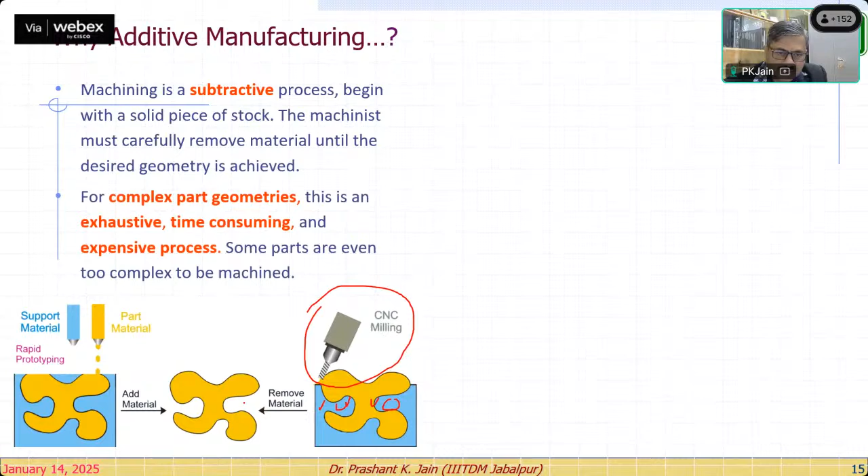So removing material from these areas is very difficult. So instead of going for a subtractive process, we choose to go for an additive manufacturing process, where we deposit the material successively. So here you see this is the part material, and this blue color is the support material, right? So instead of subtractive, we are adding the material to a component. So this is what we call additive manufacturing.

And the main advantage we get when we go for additive manufacturing, or you say 3D printing, is that the complexity of the part is no more a limitation. Any complex part, whatever we can imagine, whatever geometric modeling can be done using any of the software, we can print. So we often say a picture is worth 1,000 words, right? Instead of communicating in word language, you would prefer to give a picture.

Initially, additive manufacturing or 3D printing was developed as a communication tool, where people wanted to communicate with their team members, share their ideas, share their product with the patent office or something like that. So suppose we have a picture, which is known to be worth 1,000 words. Now what is happening? We have a model in our hand. So a model is worth 1,000 pictures, right?

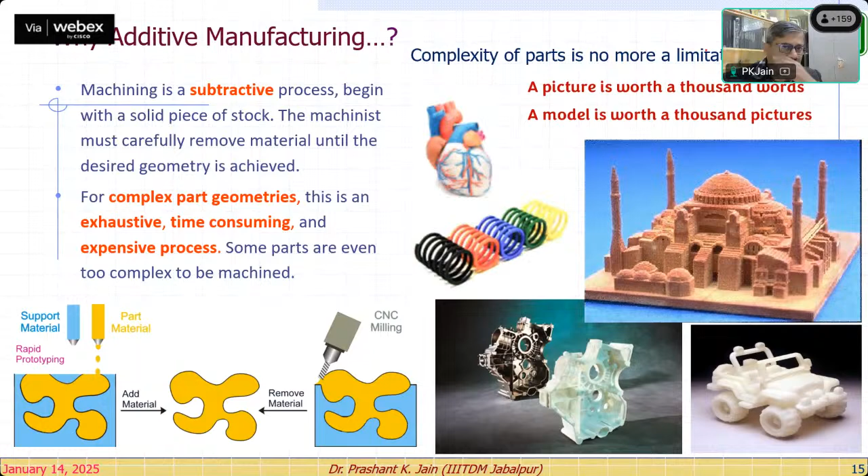So this is the advantage we get with additive manufacturing processes. We can save a lot of time, we can save a lot of material. The process is very, very fast, right? So with this advantage, we go with additive manufacturing processes. I will be coming to the biomedical applications. Then we have the two processes.

So the first process, which is most popular, easily available, and nowadays very economically viable for you, is known as fused deposition modeling. Just like our Mehendi cone, we use two filaments. One filament for support material, one filament for part printing material, and we have this layered information, right? So everything in additive manufacturing you want to have in layered information. So one layer, second layer, third, fourth, up to the top.

And here we detect the overhanging surfaces. So below this overhanging surface, the support is generated. And in the FDM process, this is done on the platform. This is a closed chamber, and two wire spools are there, the heated rollers are there, and here are the extruder head and heated nozzles. So from this, both materials are extruded one by one on different layers. For example, on this layer, here the support material is deposited, here the part material is deposited.

And from here you can see how every layer is modeled. So see the different models and different parts you can get. This is the house model, this is the big assembly for an engine model, right? Then you can see this process video as well before we move further. So two processes we are going to talk about.

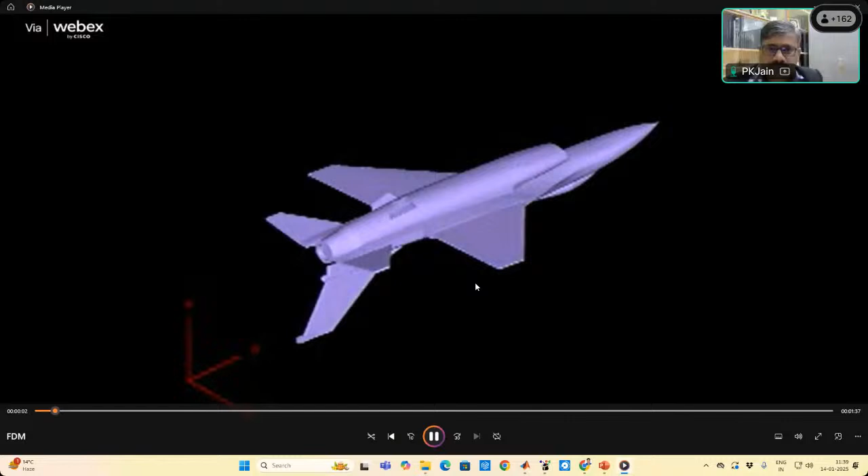Starts as an STL file generated from a 3D... Can you listen to the sound as well? Yes, sir. CAD program. The model is oriented within the computer exactly as it will be built in the FDM machine. Orientation may affect build time, strength of features, and support material generation.

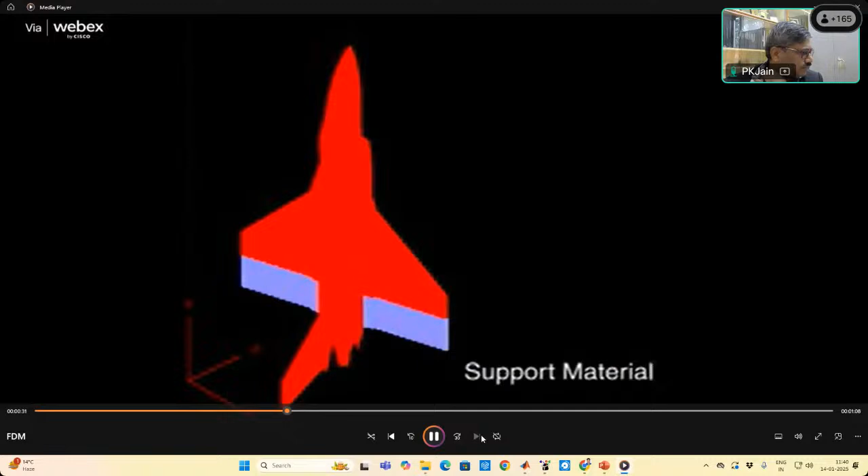Once the model is oriented, the software divides the model into evenly spaced planar sections, each measuring as small as a few thousandths of an inch. Supports are then generated for overhanging sections. Each layer consists exclusively of non-overlapping and non-intersecting curves. Tool paths are created in the regions, indicating whether the FDM machine should extrude model material or support material. Once the tool paths controlling the XY movements have been generated for all layers, a file is created and sent to the FDM machine.

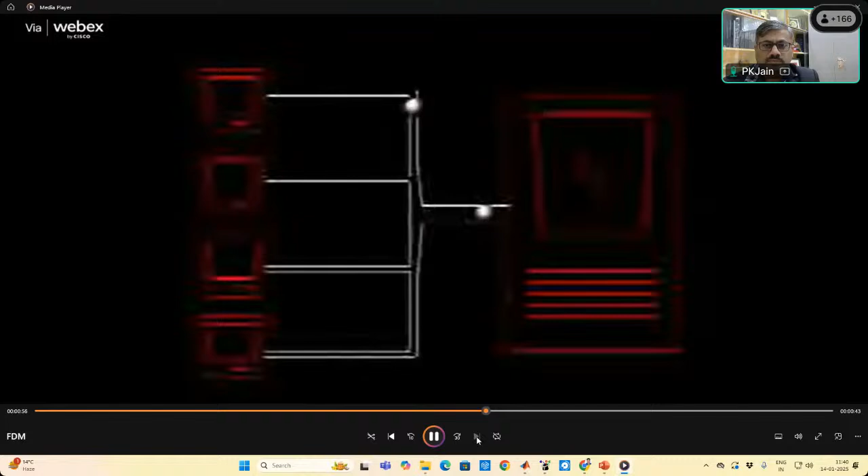Inside the heated build envelope, the model material in filament form is heated to a less viscous state for extrusion. The model is built layer by layer from the bottom up. On each layer, the extrusion tips follow the tool paths calculated in the computer. After each layer is completed, the plate drops and a new layer is added. When the final layer is complete, the model part can be removed. After support material is removed, you are left with a strong, durable, and functional prototype.

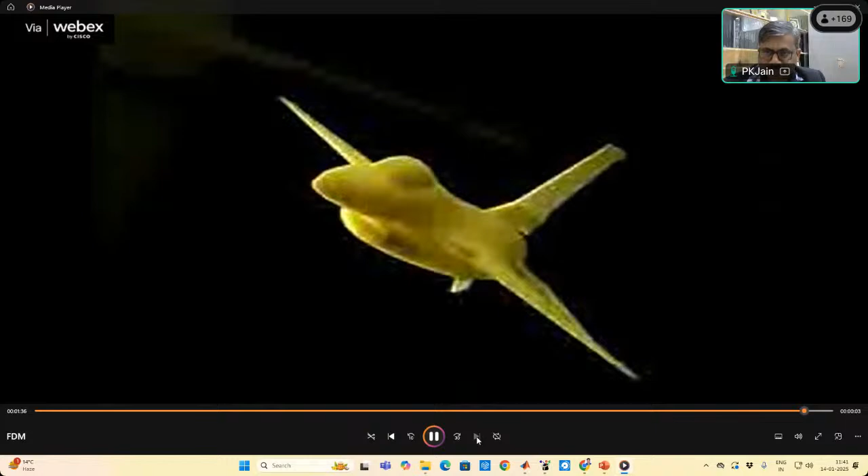Right, so this is what we have, the FDM processes, right? Very briefly I am going. If you have any question about the process, please type in the chat box. I can read on another device and I will discuss. Otherwise, I will keep on moving, right?

So the next process, very briefly, I'm going with the SLS process so that we will be able to understand why we are talking about the programming to be done in MATLAB or any other software package, whichever you would like for comfort. If you are good in programming, you can use Python or anything else, right? I have done a lot of programming to have my own apps, my own machines to be controlled. I'm using MATLAB.

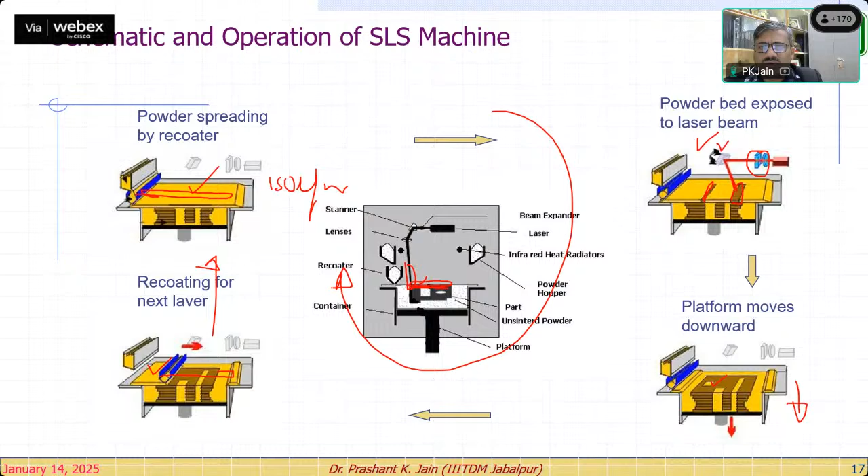Once it is solidified, this entire platform will go down. Once this platform goes down, right, you can see this selected area. Now this recoater will again recoat the new layer, right? So your system will be ready for the next layer. Then this cycle will keep on continuing until the full part is fabricated, right? So look at this one small video. Okay, let it be in this screen itself.

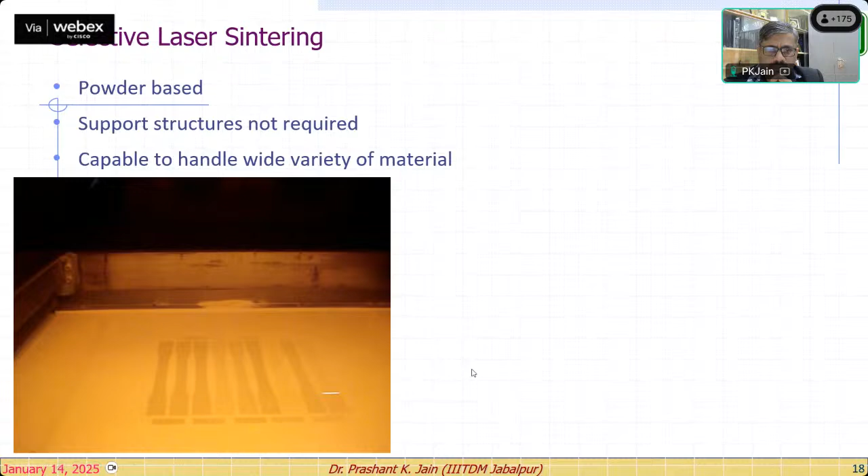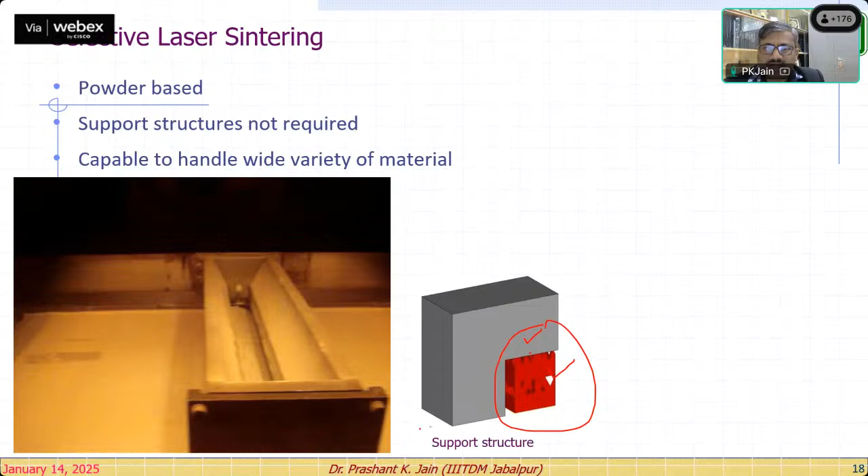See, this is the recoater. See, this is the recoater spreading the new layer on the pre-built part. So the platform goes down every time. And you see, in the FDM process you require support for overhanging features, but in the SLS process you don't require support, because the unsintered powder in the powder bed will support overhanging features like this here, right? So this is the unsintered powder and this is the solidified powder, supported by the unsintered powder material. So you don't require any additional support structure in the case of the SLS process.

Now see which kind of parts you can build over here. Hollow space with two different materials. Okay, to create hollow space with two different materials. Are you talking about two different materials or two different layers?

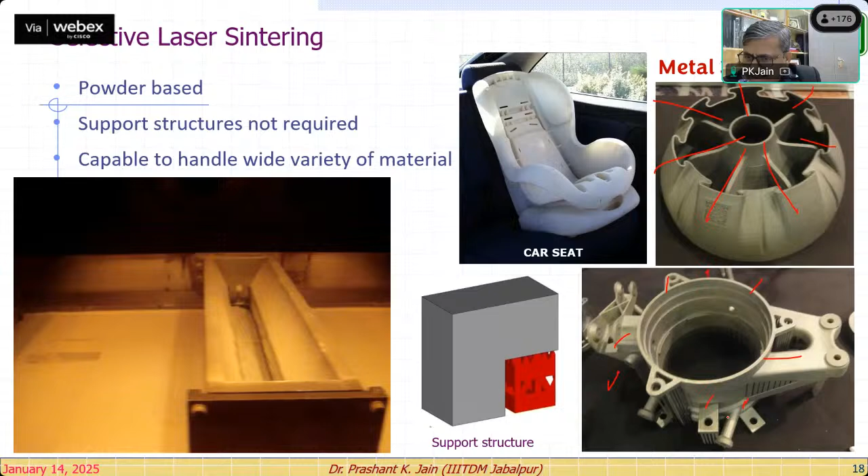No single parting line or parting surface would be sufficient. More than 20 parting surfaces would be there, and you have to assemble the die, do the casting, and then remove the die. See, similarly in this, how many parts this component has. So the machining is almost impossible, and going for forgings and castings it is very difficult to create a die, right? Every time the investment casting.

But when you go for additive manufacturing processes, that you can easily create. You can see over here, using additive manufacturing, such metal components can be done.

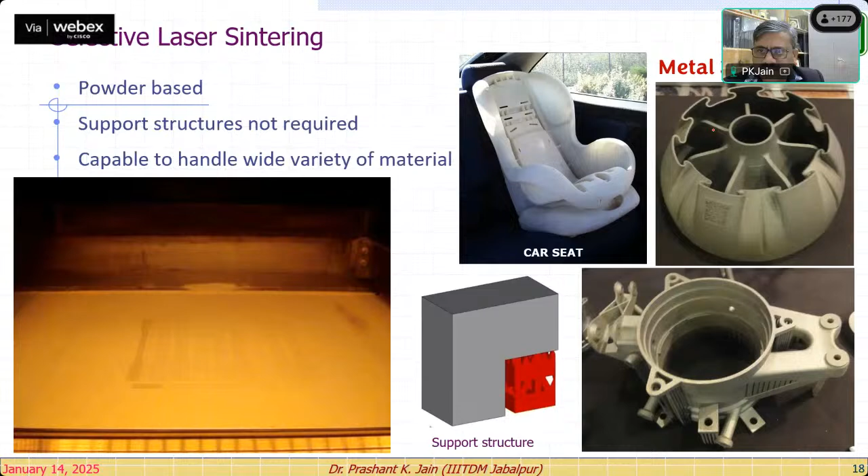Now look at this. I'm coming back. First I have covered the processes. Now I'm coming back to the process chain. You see here what we have to do. The creation of geometric model. You can do it with ProE, CATIA or any other software, whatever you would like. Then you have the tessellation, right?

What is tessellation? Anybody have any idea? You can type in the chat box.

So see here, this is the tessellation. You have a spherical ball, and this spherical ball is converted into the piecewise approximation of the surfaces, right? So everywhere the surface is a planar surface like this, right? And once we take the minimum sided surface, we reach the triangle, right? So once it is in triangles, we call it the STL file, standard triangulation language, right?

And then we do the slicing. So what happens, this tessellation only facilitates the slicing processes, because otherwise it will be very, very difficult to have this surface cross section calculated, right? So see, look at this, one cylinder, you have another cylinder. Can you identify the difference?

This cylinder is a cylindrical surface, and here it is a tessellation. So you see everything is now converted into planar sections, and it has to be mentioned in triangles, right? Standard triangulation language. So that's why everything is now kept in triangles, right?

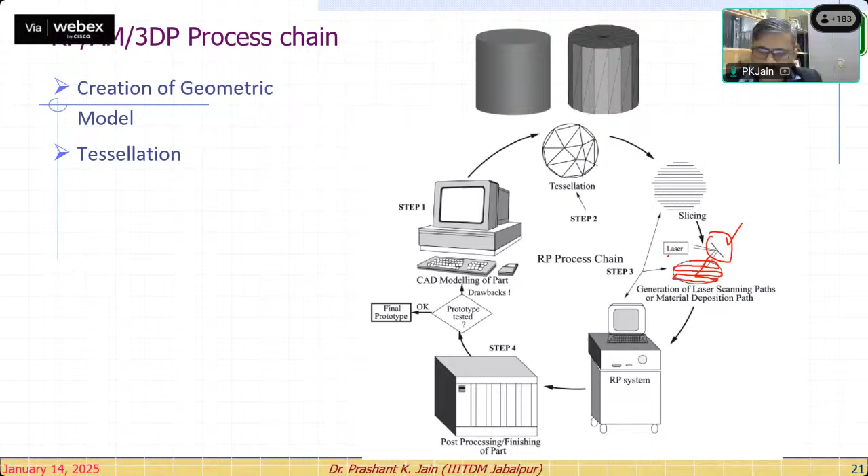Once you do the slicing, after that, either the nozzle path, depending on the technique. If it is an FDM process, then you require a nozzle path, and if it is an SLS process, then you generate the rotation of the galvano scanner to find out the laser scanning path. Once you have the laser scanning path, you can print the part, you can make the fabrication of the part on the RP system, right?

Then you go for post processing, cleaning, finishing, etc. Then after finishing, you can check whether the prototype is correct or not. If not, then you have to make some modification in the model, right? So you have to do the post processing to have the final better finished product in your hand. This is the process chain we follow. Starting with the geometric model, tessellation, slicing, nozzle path generation, then part fabrication, and the post processing to be done over here.

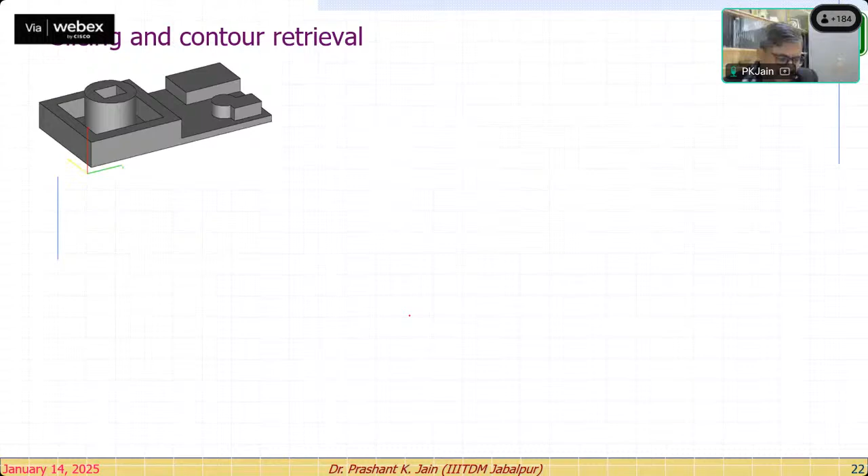Right now, let me show you how we are going to implement this entire process. Many of you are aware of many open source softwares or some high cost software like Magics, Mimics to repair the STL files, and after repairing the STL file, then do the slicing, generation of the nozzle path, etc. Okay. So look at this. This is the ProE model, right? We have created it in the software ProE. You can create it in CATIA, AutoCAD or anything.

Now you're coming to the second file. Can you notice what this file contains, the entire file? Yes, a meshing kind of thing you can say, but here there are only triangles.

Yes, the tessellation is similar, you can say the meshing, but here only the triangles are there. And the important thing you notice here: where there is a planar surface, only two triangles are sufficient. Here you see the circular surface you are getting. So the size of the triangle is very, very small, so that you should not lose the intent of the designer, or you can better approximate the curved surfaces, right? So here the triangle is small.

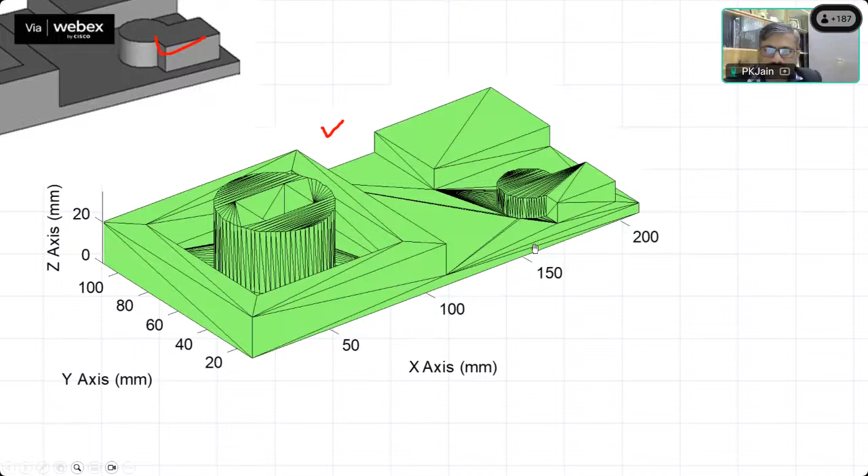You can have a larger number of smaller triangles, but if you have more small triangles, the number of triangles in the file will be increasing, and hence it will increase the complexity of the file, because next you have to calculate the intersection, right? So you see on this top surface only 2 triangles are sufficient. Here 2 triangles are sufficient. Here in between one edge is coming, so more than 2, 3, 4 triangles are there, right? So this is how you have the triangles. Now look at this slide.

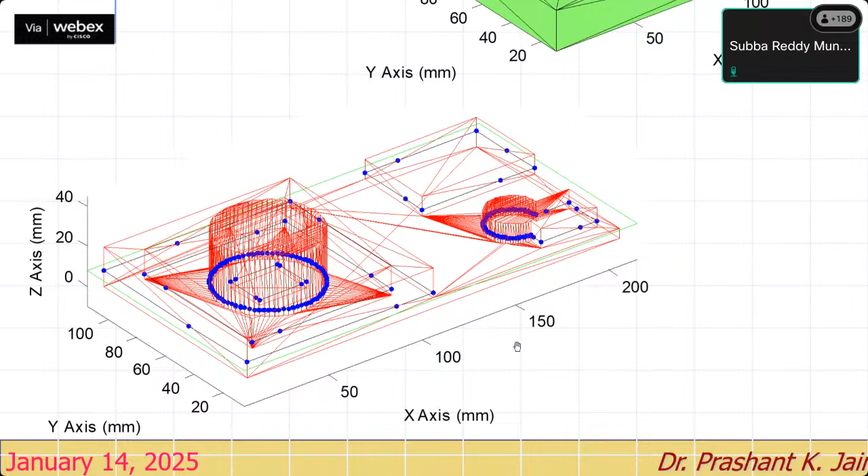Yeah, generally if we talk about tessellation, we can take any polygon. I will show you. Very good question. Please remind me towards the end of the session. We are developing a new STL file. Because the STL file is already a de facto standard, every vendor and manufacturer uses the triangle, right? So if it comes to the STL file, we have to use only triangles, but we are working on higher order polygons. I will show you in MATLAB. We are removing redundant data from the STL. In this session I have not included much on the STL file, but if time permits, I will go back to talk more on the STL file. Thank you for your interest.

Look at this. So for these triangles, the blue color dots, we are finding out the intersection points, right? Now if we plot all these blue color points, we are going to receive this. This information is not at all useful for us, because the random triangles are there in the file and we are just calculating the intersection points and plotting them, right? What we want here is an exact contour. Suppose we are intersecting at height 8, so we want this intersection. We will get this external contour, this internal contour, this contour like this. So this information we need to transfer into this form, right?

And what is happening here, you can see from this point we have identified this as a contour, right? This is another contour. Got it? So you see here, this is the external contour, blue color. This is the internal contour, dotted line, red color. There are clear-cut directives, methodologies, algorithms in the CAD applications on how to write the information of an external contour and how to write the information of an internal contour, right?

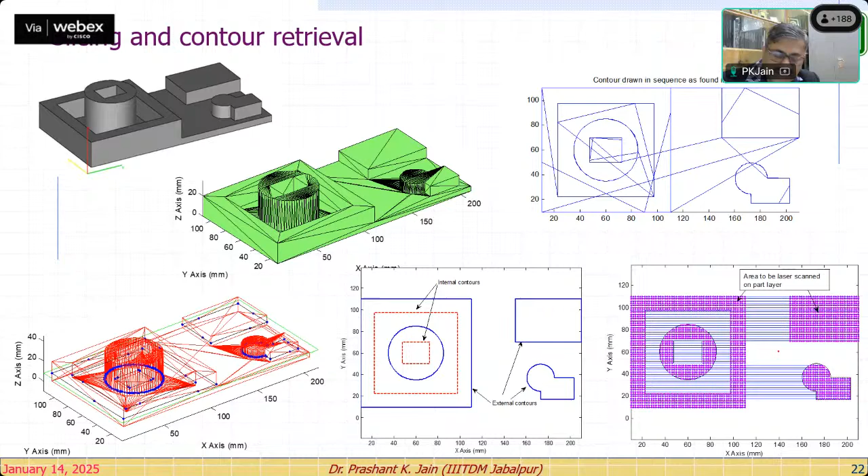Now look at how we do this. For example, I am taking you to the Magics software. Is anybody aware of the Magics software? Please type yes in the chat box, or else I will take you to the software screen. Okay, this is the Magics software screen. Let me move to the software directly so that I can show you. I hope you can see the software screen.

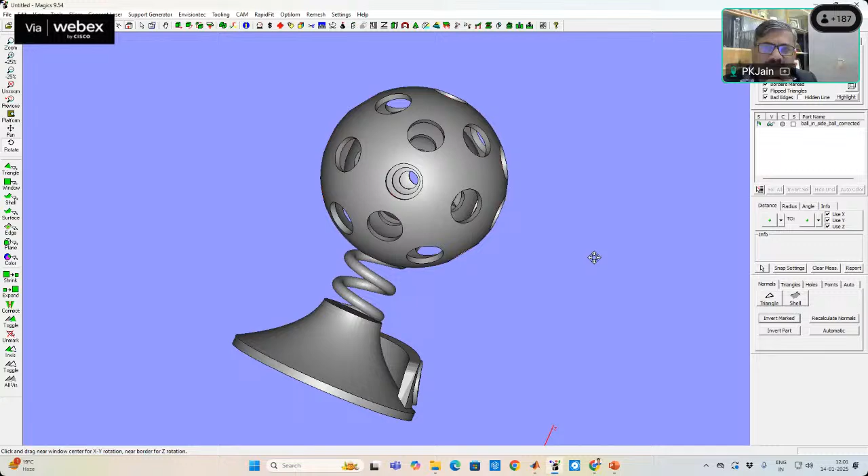See, this is the part. I think somebody was asking how we create the difference between two parts, two layers. So look at this. This part has three spheres. You can see inside there is a hole. There are three spheres, one inside each other, and they are not touching each other. We have seen the video for selective laser sintering processes. If we go like this,

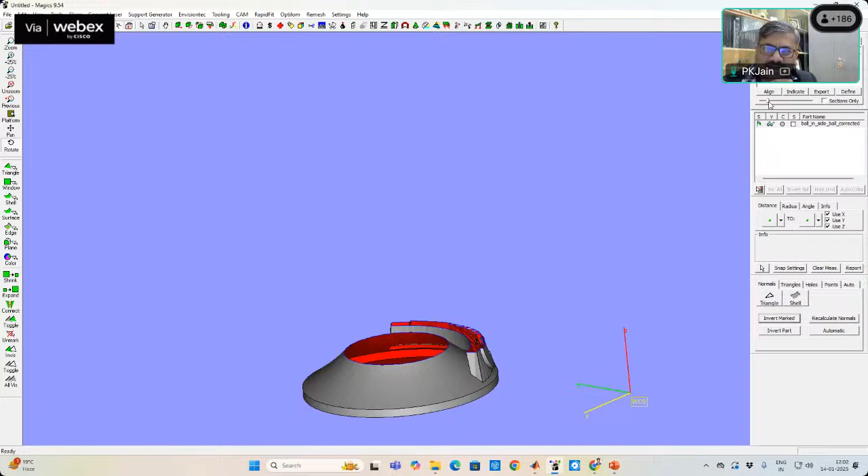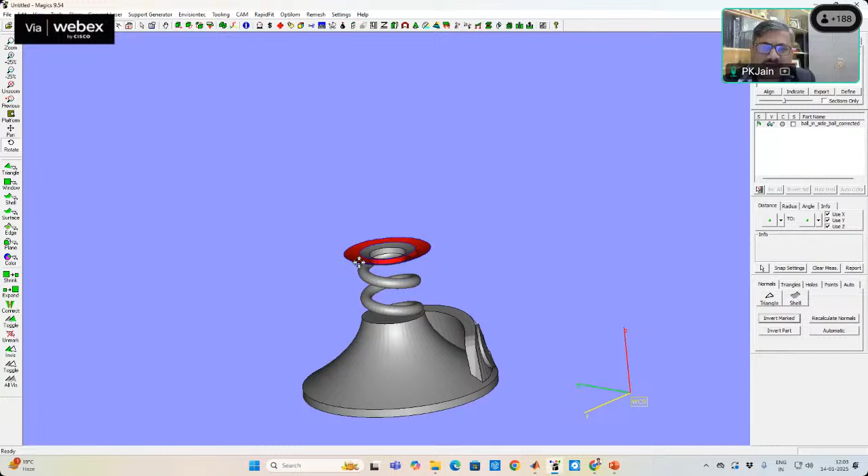The software is doing this for you, and in the previous slide I have shown you how we can do it by our own programming skills. You can use MATLAB like this. This software I am showing is paid software. You can do a similar thing with open source software also, but they do not have as many facilities. Okay, so look at this. At this height, the first sphere will start solidification.

Now let me move a little bit further. You see, four contours are there, the four red color contours you can see over here. So only in the red color area is the solidification; the laser will come onto this area. And the remaining area will be supported by the unsintered powder. Okay, now look at this.

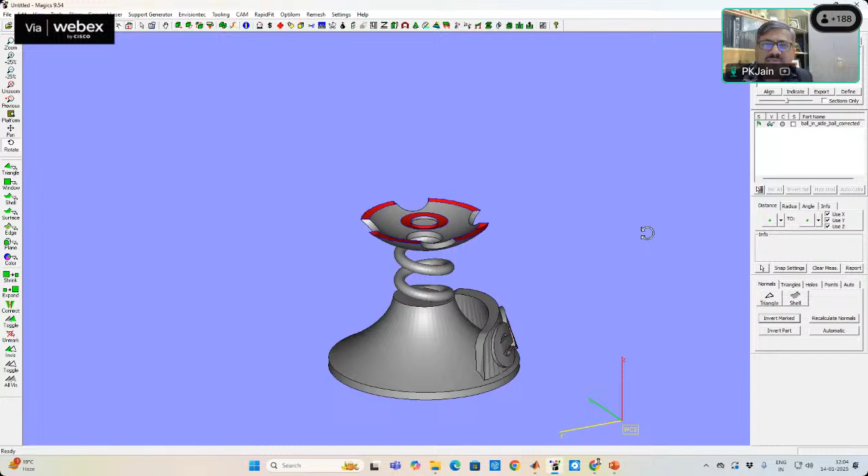If I move further, you see the second sphere starts building, and there is no connection between the surfaces. The second sphere appears just like that in space, not touching the previous sphere. But they will be built. The unsintered powder in between the spheres will provide the support. Look at this, I'm moving like this. Second sphere. Now you see the third sphere coming into the picture.

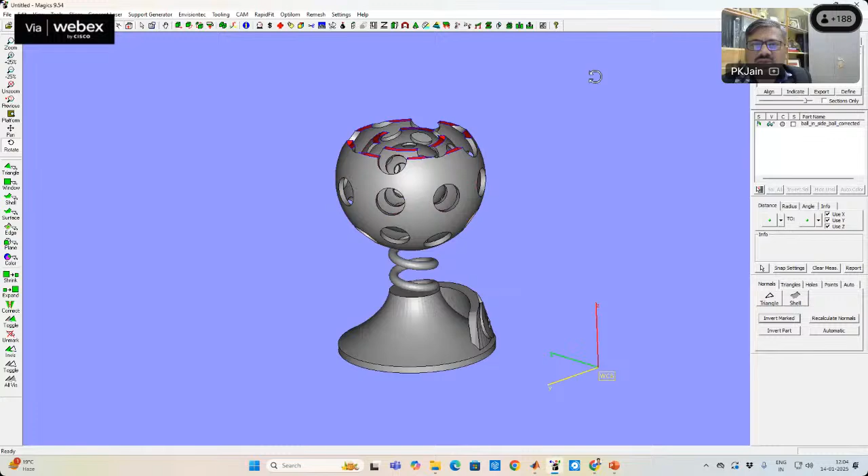So this way we continue in the actual building. This is the third sphere in the software. Look, the third sphere is about to complete. The sphere is complete, and the first and second are still going on, and in between these three spheres unsintered powder is there, trapped inside. In the design of the part itself, there are holes. They will provide support to each other, and the unsintered powder will be removed. So the part will be built as a single piece, without joints, without any assembly.

Let me move further. So this is the sectional view I have shown you. Now let me show you the triangles. Can you see there are a lot of triangles on this part? Now look at this. The entire surface is now triangulated.

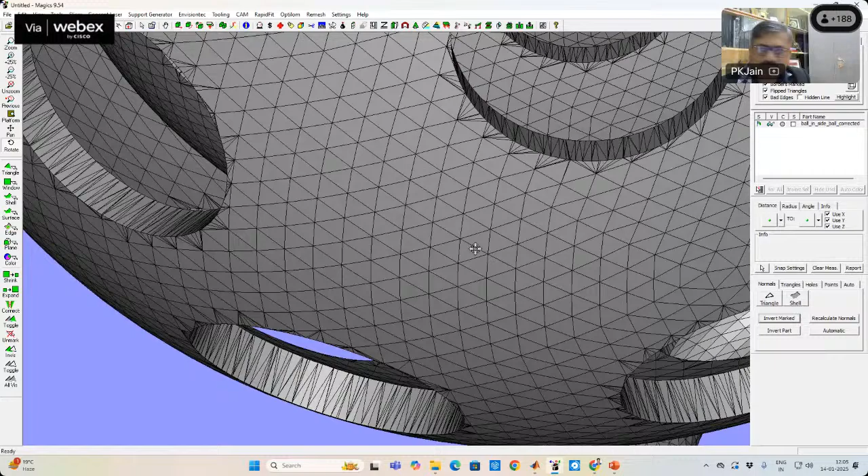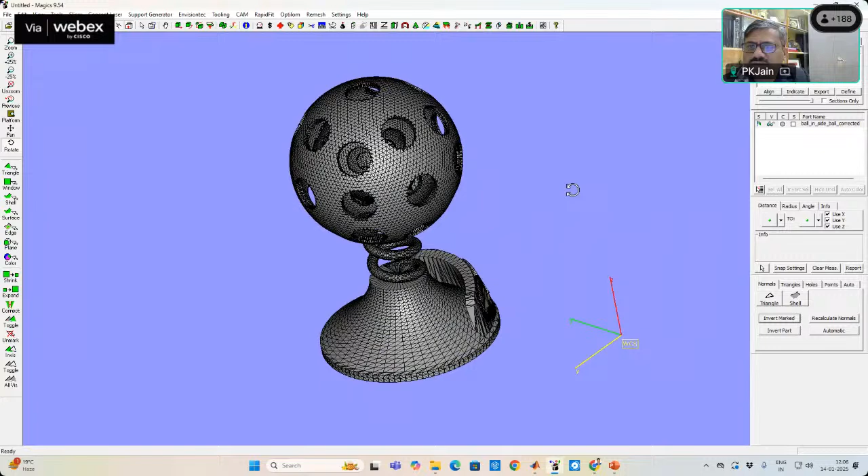This triangulation we can do with the STL file, and a lot of errors can be there. Now next I am talking on the different errors going on in this part. Let me take, and you see if I go for the sectional view as well in this mode. So look at this here, the sectional view is there.

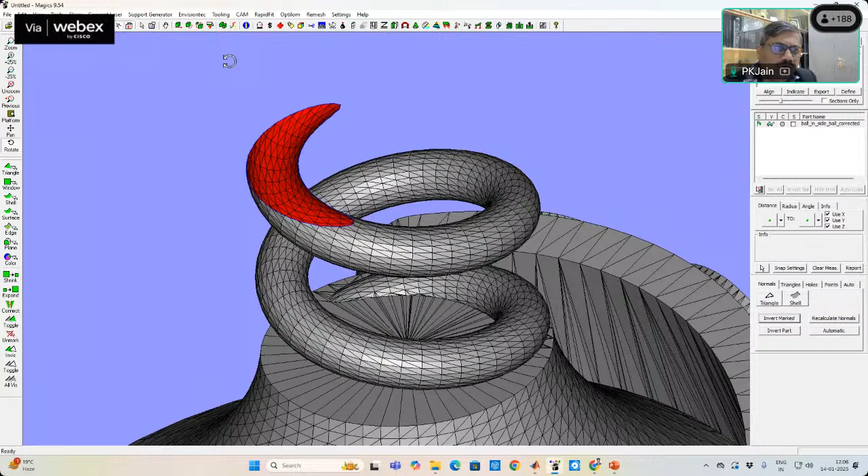So from these intersection points, these triangle points, you are connecting them, and you are creating the contour information, then generating the nozzle path. Okay, let me go back. At this moment, I am not taking any other feature of the software. Right, so this is the way we have done the slicing, or you can say the STL file repair, etc. we can do with this Magics software. Now you can do a lot of manipulation, you can cut the part, you can write text, engrave many things.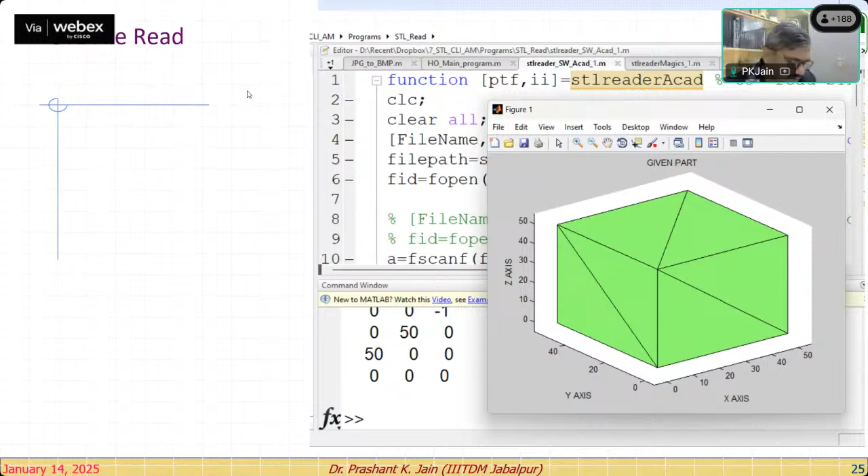Okay, now we will come to the MATLAB part. We can open this STL file in MATLAB, we can see the manipulation of the file, we can repair the file. Okay, so look at this. Has anybody opened an STL file in Notepad? Is anybody working with STL files? Type yes or no in the chat box.

You can see on your screen the STL file exported, one on the left side from SolidWorks. Right, this we have exported from SolidWorks or AutoCAD, and this is from the Magics software. Okay, so this is the STL file, standard triangulated, and how the information is written. You can see over here, facet normal, outer loop, one vertex, second vertex, third vertex, right? Here the unit is in scientific notation. Here it is decimal.

So you see over here the solid, the facet normal. This is the facet normal in the STL file. This is the outer loop. So first vertex means x1, y1, z1, right? This is the triangle. So this is the first vertex, second vertex, and third vertex. So xyz for the first vertex, and the same for the second and the same for the third. And this is the surface normal. So cx, cy, direction cosines in 3 directions for this surface normal, right?

So you can have this file, and how it looks like this. For example, let me open this file. If we are using the cube file over here, can you notice how many facets should be in this file? Anybody? How many facets will the cube have? How many faces does a cube normally have? A cube has 6 facets, right? So every facet is now represented as triangles. So how many total facets would there be? Yeah, Deepak, correct. 6 would be in a normal case.

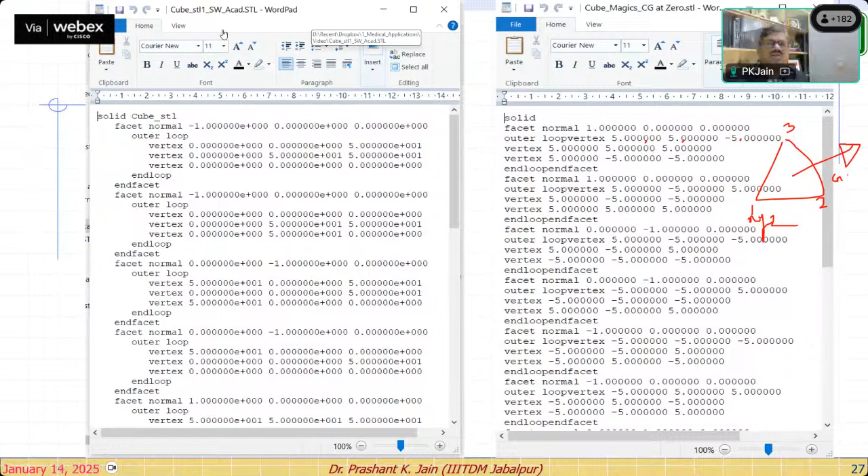In this one there is scientific notation, and if I open this as well, see here, this is in decimal places. So remember how a file is written by any software package, right? That we have to understand. Suppose we have exported this file from AutoCAD or SolidWorks, the structure is like that, and from Magics it will be like this, right?

So see here, what I have done, I have taken 0 at the center point. So everywhere the cube size is 10. So what is happening? 5, minus 5, minus 5, like this, everywhere this data is coming, right? Similarly, in this case the corner is at 0 and here the center is 0. So you see the points are 5, minus 5, and here 10, 0, 10 everywhere, right? The cube is like this. Okay.

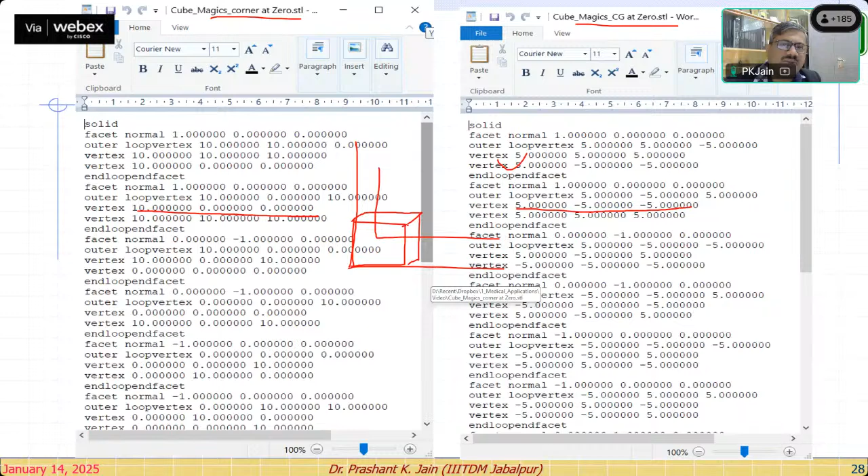Okay. So here we have taken this as 0. So everywhere the value is 0 and 10, 0 and 10, right? And here what happens? For this figure, we have taken the center here. So everywhere 5, minus 5, like this is happening. Okay. So this is how the STL file is done, right? Now let me take you to MATLAB.

Let me open a read file. Okay, one program, right? You can see it on your screen. Please type in the chat box.

Yeah, okay. What is the use of the STL file? STL file is a standard triangulated file, because in your STL file, what is required? Okay, let me go back. See what our principle is. The principle in the case of rapid prototyping: you want this cross section, right? How to get this cross section? This cross section would be available by intersecting. If you take this typical surface and calculate the intersection, it is very difficult to get the intersection.

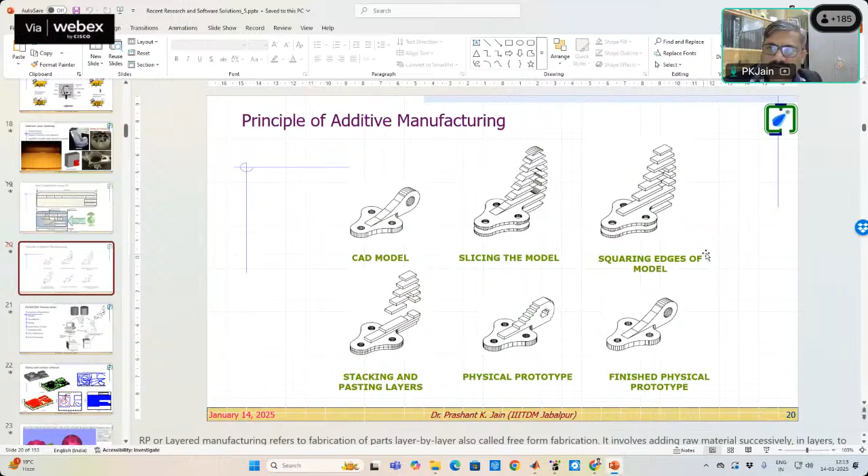So what we do is the triangulation, or we export this file as an STL file. What is an STL file? It is a triangulation, right? So that's why we take the STL file, which facilitates the calculation with triangles. I will be coming to that again a little later, okay? I have explained to you, here is the triangle, here is the plane. So getting an intersection with a line and the plane is very easy.

Okay, you have a lot of software available to get the STL file. You can use any open source software or any cloud-based application; you can generate your geometric model, upload it and get the STL file. Try to open it and see in Notepad how it looks, right? Let me go back to MATLAB. See here, a small program.

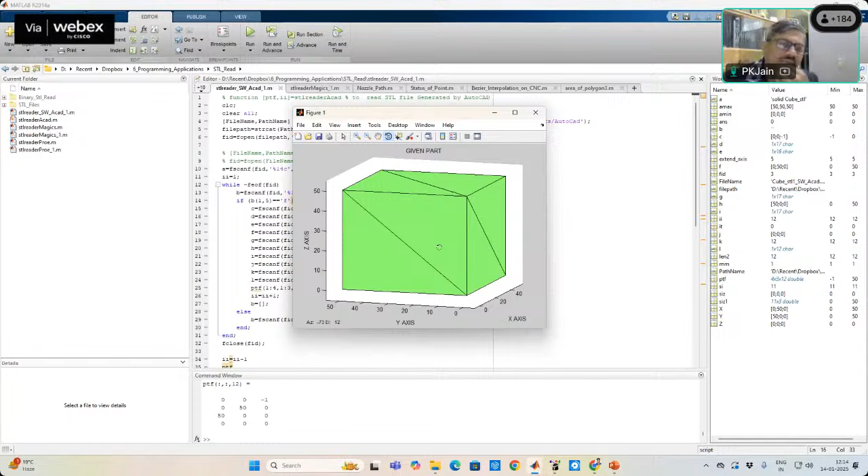I hope everybody has done C++ programming or MATLAB programming. We are just reading the text file in MATLAB. Okay, so solid one, yeah, cube. The cube I have shown you. Let me open the cube. Now look at this. This is the cube file. We have opened this cube file in MATLAB, and this is the same cube file we have shown you on the PPT. See over here, this is 0, 0, and this is a 50-side cube, right? This is read. So everywhere it is now triangles.

Now look at this in the command prompt. Every information that was available in the text file has been read into the MATLAB application. And you see here, there were 12 triangles. So here you see the faces we have identified, PTF1: this is the normal, and this is the XYZ of the second coordinate, XYZ of the third, and 1, 2, 3 up to 12. Whatever facets are available in the STL file are now available to you in a mathematical form. With this mathematical form, you can calculate the intersection.

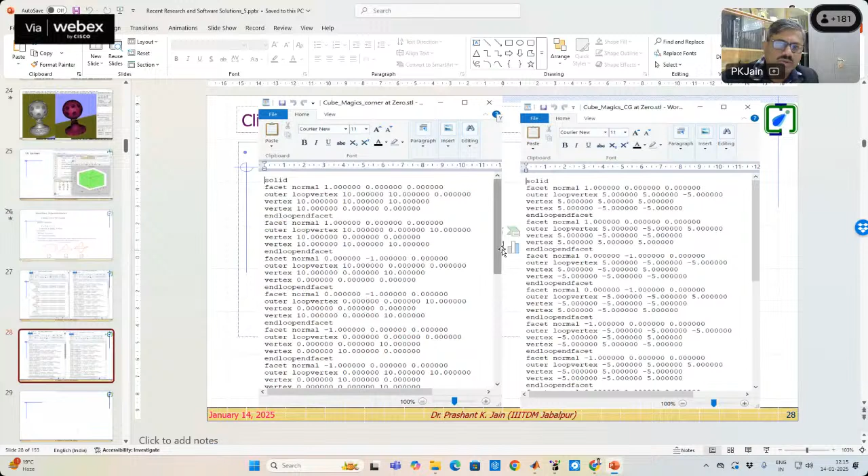Right. In many cases, what happens? These STL files have errors. Suppose we delete something, or by mistake our software is not able to generate the complete closed volume. An STL file should be a closed volume. Look at this. This will be the surface where the high curvature change occurs. This triangle is not generated by this application. See, this is the top surface. The STL-generated triangles you can see over here, right? These triangles.

Okay, but here what happens? This is a triangle, but there are mathematical algorithms, and tolerance limits are to be set. If the tolerance limit is more than this, the software will not generate the triangle for this portion. What happens? This will be a hole, or you call it a puncture, right? So when you go for the slicing process, you cannot generate the slice for an STL file which contains the hole.

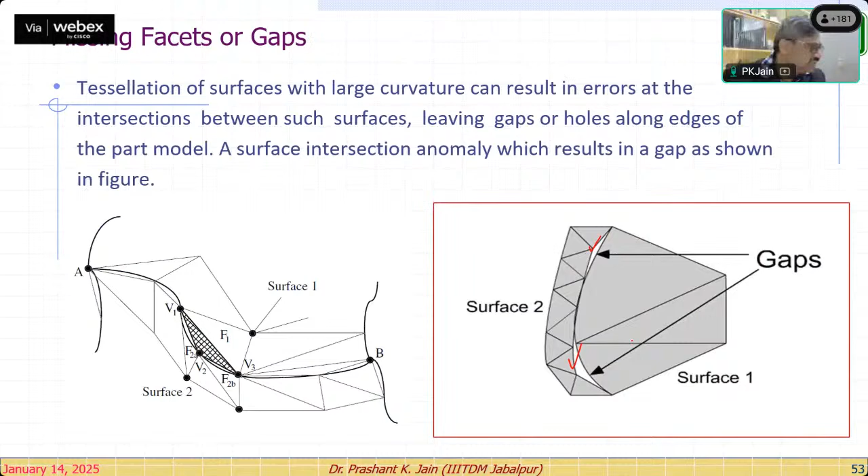So look at that. You have to ensure that your model should not be having any such error. Otherwise, your machine will not be able to build the part. Okay, look at this. You have to create a valid model. What do we call a valid model? No missing facet, no degenerate facet, no overlapping facet, or any other abnormality, right?

We are not going into detail at this moment of the different errors and how to repair them. We are just finding a valid model. Valid model means no hole. You see, this model is correct. All sides are covered. So what is our step? Go for the slicing. Slicing will be generated just like a biscuit packet or bread packet. You can see the different slices are there.

Then the next step, for each and every slice you have to generate the nozzle path. Okay. So this will be the third step, you are going to generate the nozzle path. Okay. Now see, if you have an invalid model, look at this. Here two facets are missing. So what we call it is a gap. Okay. Once you have this gap and you go for the slicing, what happens with this gap?

You calculate this contour, and since in this portion you don't have any triangular facet, right? So what will happen? Your contour will look like this only. This contour is not at all closed. Okay. Now you are going to generate the nozzle path. So if you generate the nozzle path, what will happen in this area? When you come over here, it is going to infinity. Your nozzle will not come back. Right, there is nothing to obstruct the nozzle path, or you will not have the closed contour.

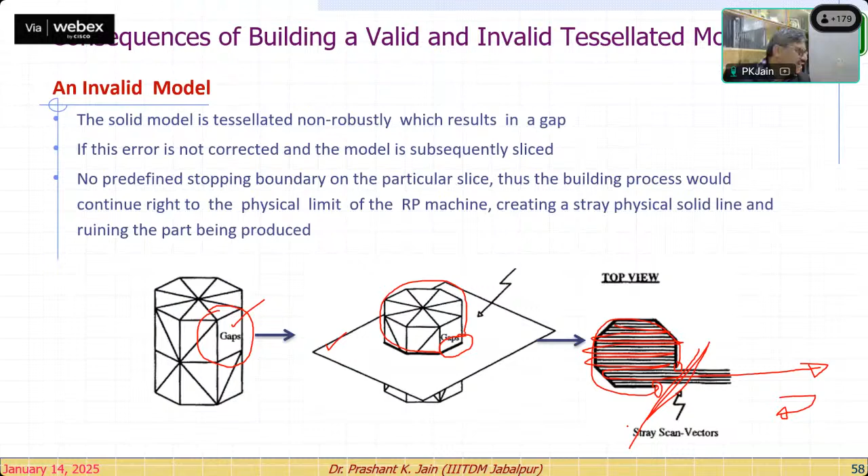I hope this point is clear. If any missing facets are there, you will not be able to generate the nozzle path. So what you can do, you have to repair this STL file, right? Then there are algorithms, methods to do that, then you need to generate this, right? So say for example, this is a gap, then you need to generate the different triangles, identification of this gap, right? This gap is now again subdivided into the triangles in this way.

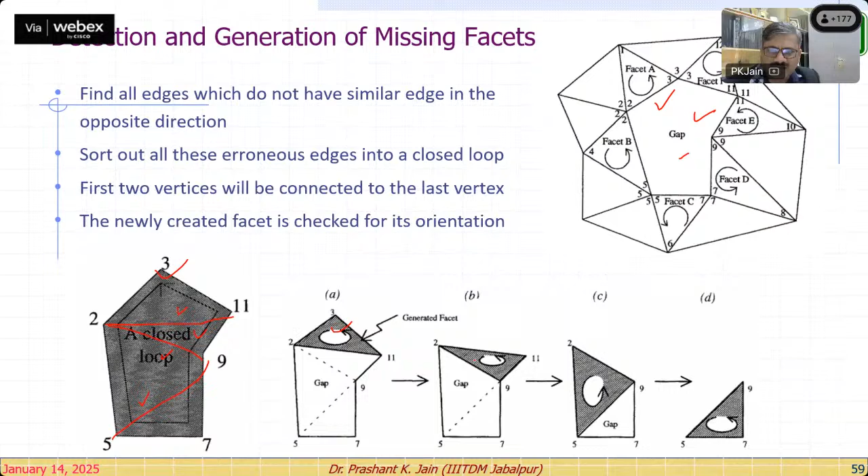And these many triangles are written back into the STL file, like first triangle, second triangle, third triangle, fourth triangle, and they will be written into the STL file. I will show you how to implement this in the MATLAB program. Okay. See, that is what I have told you to get the intersection. Let me first go to the MATLAB, then we will come back again.

See this small program I am showing you to get the STL. So we have taken this STL. Okay. Can you notice here? One facet is missing.

If you are allowed to unmute, you can talk.

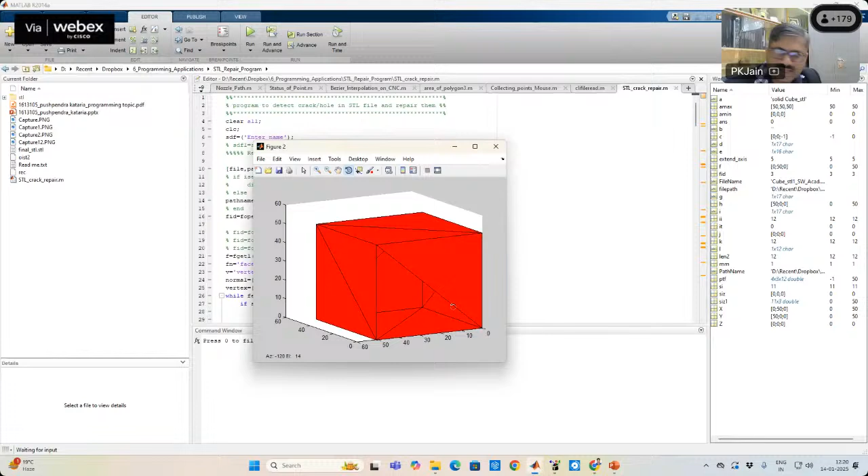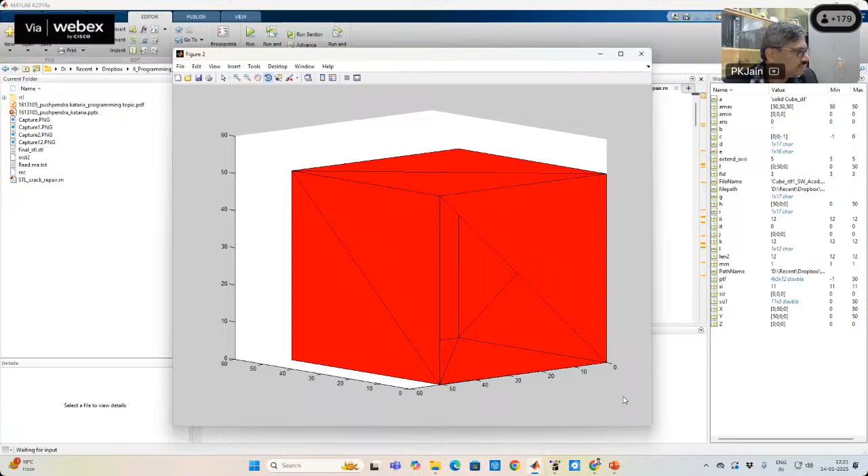And can you notice how many facets are missing here in this? See, the inside triangles are visible. You see, this facet is missing. Yeah. Right? Now this program we have written to repair, to identify which facet is missing and to fill that hole, right? You see the typical programming, you can see a lot of conditions to be checked.

Okay. And this program we have to take. So press 0 to fill. Now look at this, what happened? This hole is filled. And just like any commercial software package, this will take it to the file. So if we do not want to change any further contour, we will type 2 to generate the STL file and press enter to have the file.

So KKR, let me write, and you see here in the side panel, right? There is no KKR file available in the left hand side current folder. Okay. Now once I enter the file name KKR, the new STL file is generated. Here, look at this KKR. Once we open this KKR file, you see here the way the STL file was written, so it is generated. Got it? This is the way the STL file is generated.

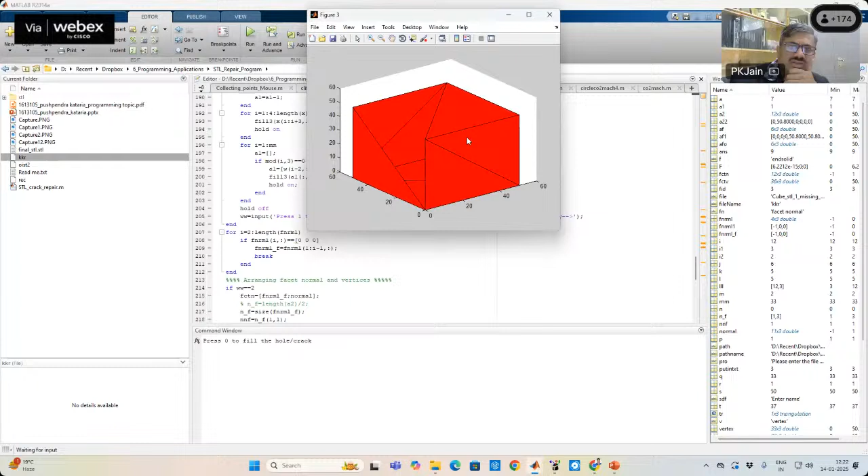Now even if I run once again, let me take another file which has two missing facets. See over here. Can you notice here the two facets are missing? Okay, so here two facets are missing, right? Now let me fill this.

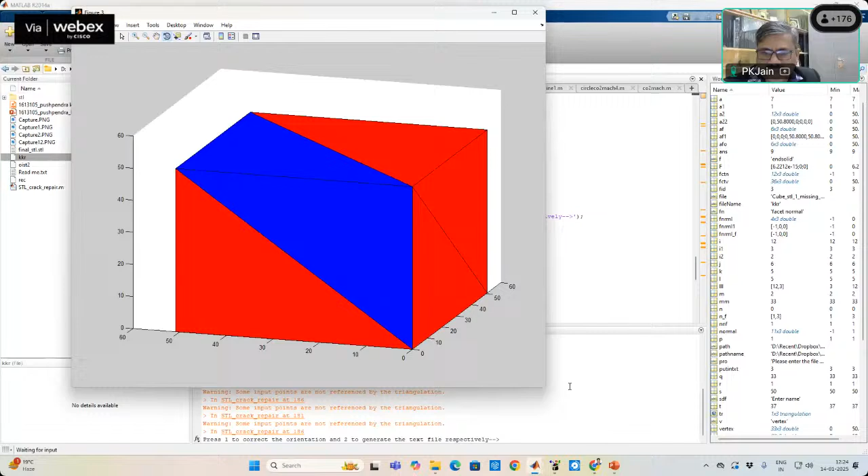Okay, so now we can write over here the new file like KKR1. Sorry. The file name is kkr2. And you see the new file kkr2 is created. And you open it, you see here, this is the new file. New STL file is generated, which is corrected, right? Now there is no hole, nothing like that. Okay. So we can move.

Now the next step is to generate the nozzle path, right? So for nozzle path generation, let me open another file. Okay, right? Then we go first for the slicing, and then we will generate the nozzle path. Okay, so let me take you back to the, and then we will see.

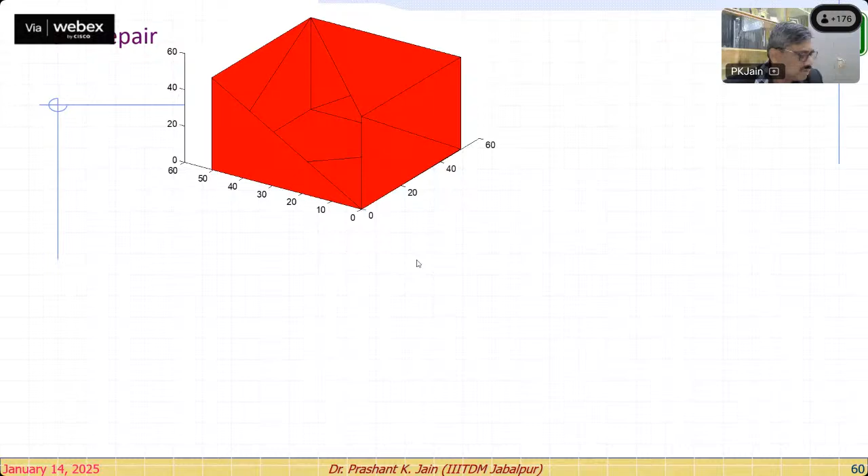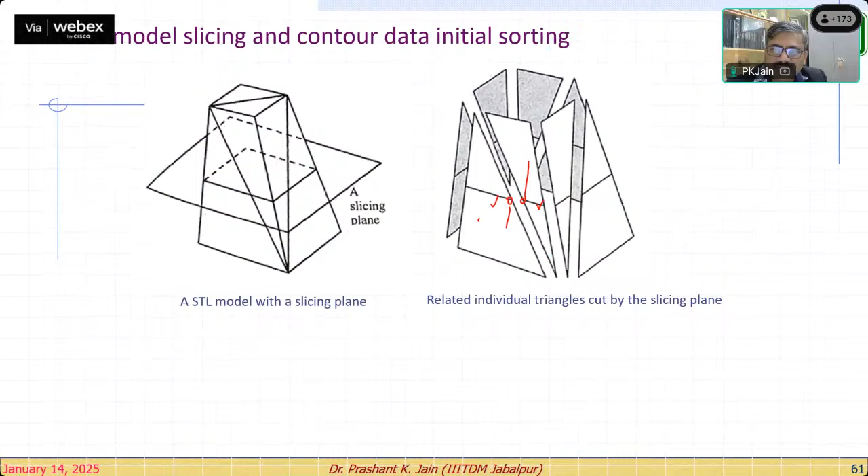0, 25 going to 0, 0. Okay. So what we will do, we will find out where this 0, 0 is available in this matrix, which means start point, end point, start point, end point. And you see in every triangle, wherever you find this connecting point, this point and this point are the same. This point will come along this triangle, this point will come along this triangle. So for this triangle, this will be the end point, and the same point will be the start point in the next triangle.

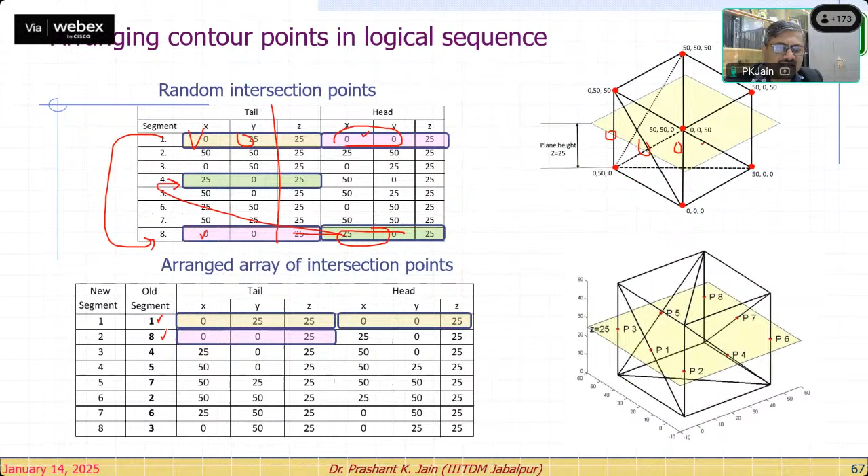Okay. Now look at this. So see, we will have this, and then we will find it out in this way. So 0 0 connected to 0 0, means the first segment will be connected with segment number 8, going 25. Then you will find this 25, so this will be connected with segment number 4. Got it? In this way you are proceeding. So you see here the first segment is connected with the 8th segment, the 8th is connected with the 4th. In this sequence your segments are connected. So you will get this contour information.

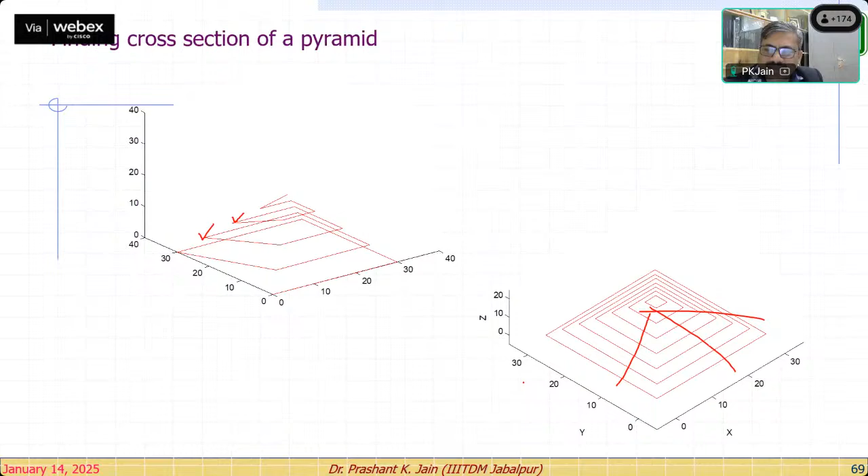Okay. Then you see here, I am just showing you the pyramid. So you see here, the STL file is intersected, 4 points are found out, and the contour is formed P1, P2, P3. Got it? And then by this way, you will do the intersection at each and every layer, and you will find this contour information for all successive layers in the case of the pyramid. Got it?

Then we write all this information into the CLI file. Let me skip the CLI file at this moment, coming directly to the nozzle path. Before this nozzle path, suppose this is the blue color contour you find. Okay. In this contour, you will set the parameters for 3D printing and generate this nozzle path.

And this nozzle path has to be provided to your 3D printing machine in the form of G code and M code. Right? I hope you remember this G code, M code you also use for CNC machining. The same G code we will use for the 3D printer, right? And all this information is written into a text file, which you can directly send to the 3D printing machine. Okay, let me take you again to MATLAB.

Let me close all this. Okay. Let me open a file. Now I am opening an STL file in this program. So since we are talking about a cube, let us take a cube. Okay, and this cube. See here, the program already knows its minimum Z is 0 and the maximum Z is 50. So let me put the height, say 34. Now see, this is the STL file in the first sheet.

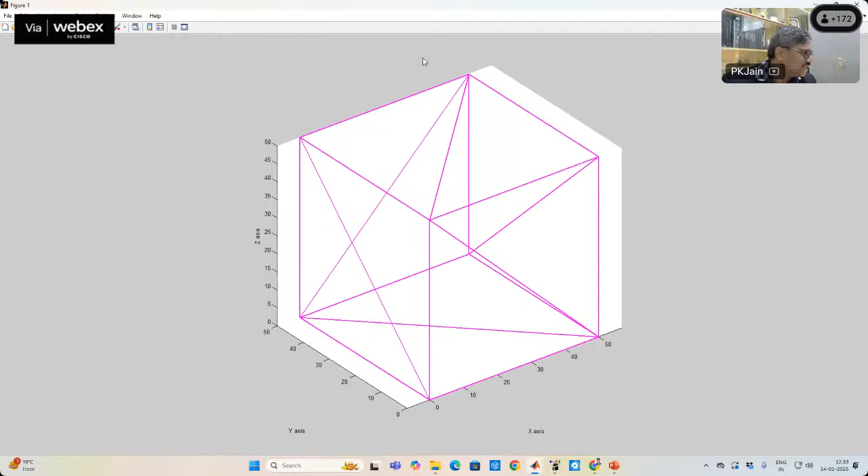See, in the first figure, this figure. This is the STL file. Okay. Now look at this second file, which I have already shown you in the PPT. You have found the different contours, different intersection points, right? This file. Okay, you got the different contour points.

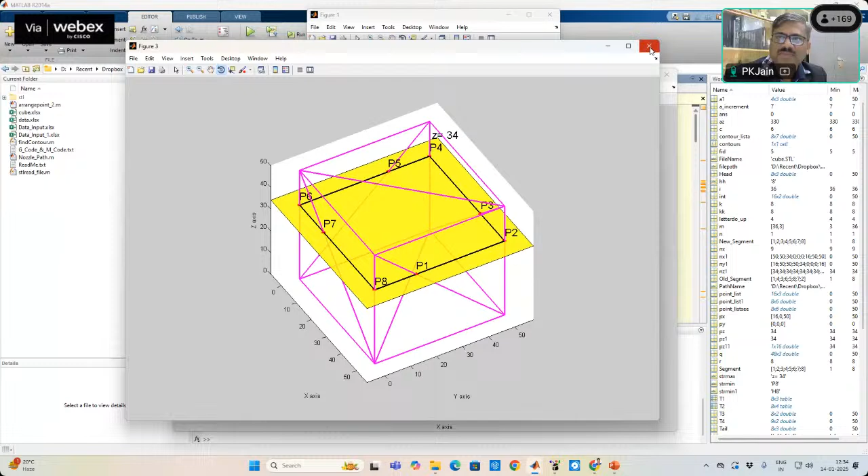Okay, now in the third file, you can see here, you have found the contour, the black color contour you can see, right? This contour we will send to the next program, which will generate the nozzle path and save the program in G and M code. Okay, let me close all these three files first. And you see here in the side panel, we have the G code and M code file, right?

I'm deleting this file so that the next program will automatically generate this file. Right? You can see the blue color I have highlighted here in the side panel. I think there is some time lag. Okay. So see here, the G and M code file, I have deleted this file. Okay. Now I'm opening this nozzle path. And you see here, this MATLAB program I am running will read the data from this data XLS file, right?

Do any of you know MATLAB programming? Say yes or no in the chat box. Okay, one yes. At least 10 responses quickly. 2 yes. Okay, good. Good to know. 3 yes.

Oh, mixed kind. You see here I am using this information where we have written the data in the previous program. Now I am reading this. xlsread data. Right? We are reading this data file where all the contour points are saved. Okay. Now let me run this program. So the nozzle path is executed.

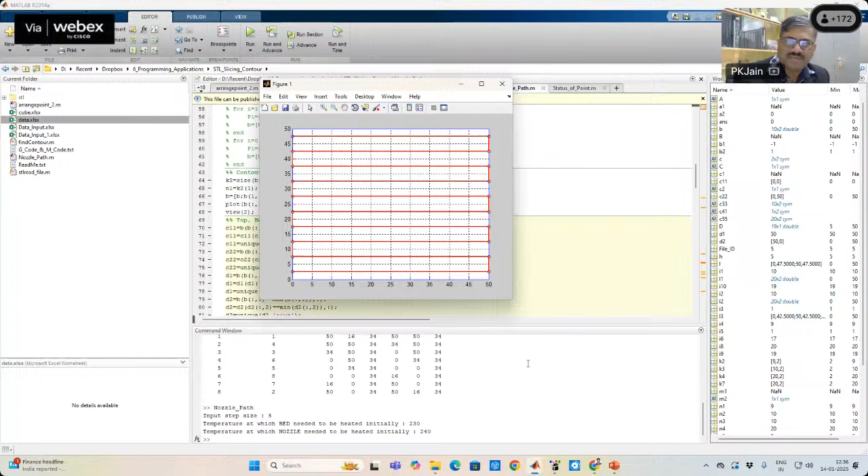Now it is asking me for the input size, say 5. Asking for the temperature to which the bed needs to be heated initially. Let me say 230. And the temperature to which the nozzle needs to be heated initially, let me say 240. Okay. And now you see this is the tool path generated, right? So this is the red color tool path you can see on your screen. Okay. Now this program is automatically writing this tool path into the G and M code.

Let me take you to that location. See over here, we are using this fprintf file ID. Notice I have just selected this text. Okay, so what is happening: whatever information we have calculated, we collected in this structure, you can see, G and M code for 3D printer nozzle path. We are opening a file G_Code_&_M_Code.txt in write mode, right? All this information we are writing, and this is fprintf. So the entire calculation we have done is written into the G code file.

Got it? Now look at this. Let me open this G code M file. Okay, you see this file you have generated from your own MATLAB program. This file you can directly send to a 3D printing machine. Got it? Okay, now I think we have done enough in MATLAB. Let me switch over to the PPT and show you some more interesting applications.

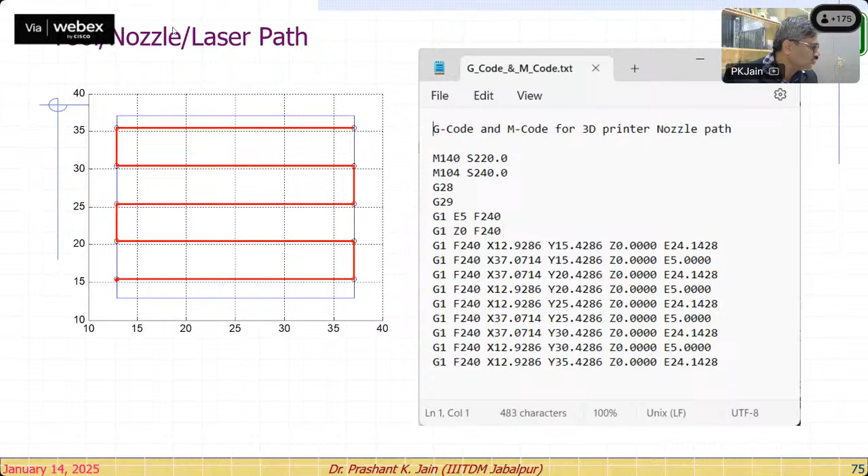So up to this part, if you have any question, please keep on typing. Okay. Now look at this. Okay, CLI file, let me leave it. Right. Now we are coming to some more applications. We have just skipped the CLI file contour information, which is required to be given to the machine.

Okay. Now see the one example I am showing you here for medical applications. Look at this side here, just behind the human ear. This side, this is the temporal bone, right? And doctors need to perform dissection on this temporal bone. The problem with this temporal bone is that the life of this bone is very less. After the death of a human, this bone is dissolved very quickly in the body, right? So generally doctors don't get this for dissection purposes, right?

So this temporal bone, this red color area, you can identify in this simulation video we have captured from the Mimics software, right? Mimics software takes your CT scan and MRI images and converts them into a solid model, and that solid model you can export in the form of an STL file. Okay, so this temporal bone we can generate, and we require an accurate geometric model of this temporal bone. We can develop it using Mimics software, and the 3D printing is to be done with close tolerances, right?

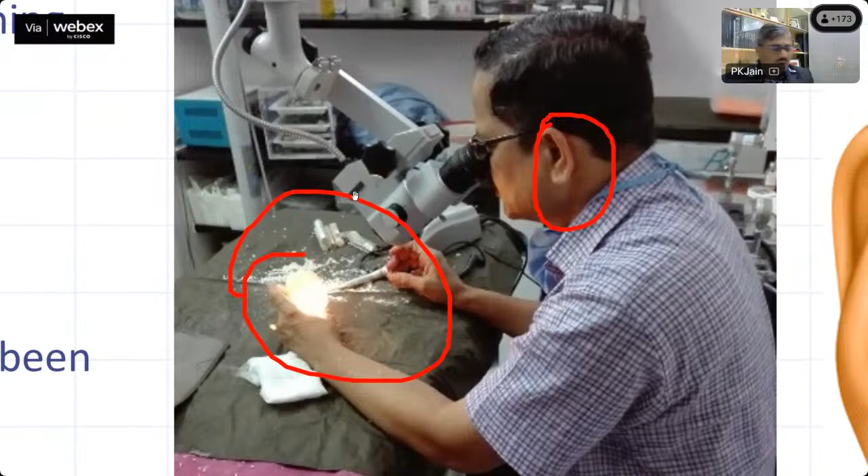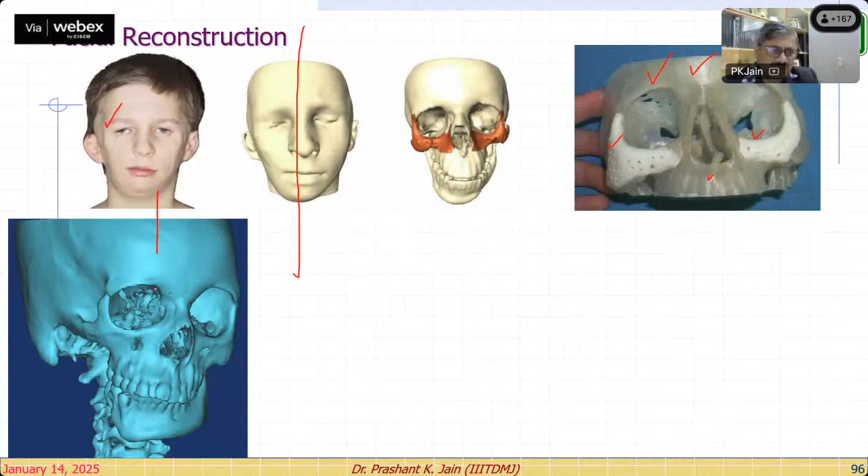Look at this. This is again the shape deformity. You can see over here, this portion, right? Another portion you can see over the same figure is there. This is the rendered view, and this is only the skull model. Okay.

See, so these facial reconstructions you can do for printing, etc. You require the programming. Otherwise, these softwares are very costly. Maybe one seat for one software is around more than 20 lakh rupees. Okay.

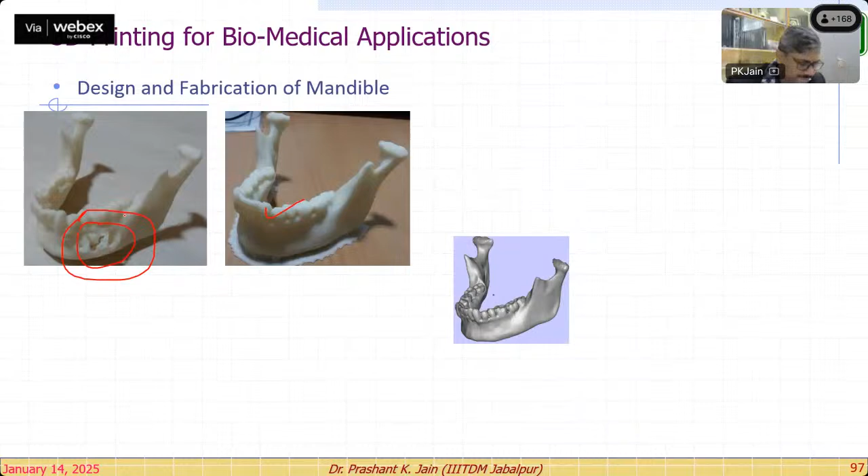See here, another example I'm showing you. Design and fabrication of a mandible, right? You see here, from a lot of tobacco, gutka chewing, this tumor is visible in this, right? You can see over here, this tumor is there, right?

So doctors have to perform a lot of rehearsal on where to cut this bone and replace it with some other bone brought from the body, right? So we import this data into the Magics software. We have created this mandible as a physical model, and the 3D printed model of the mandible implant we fabricate with the CT scan images, right?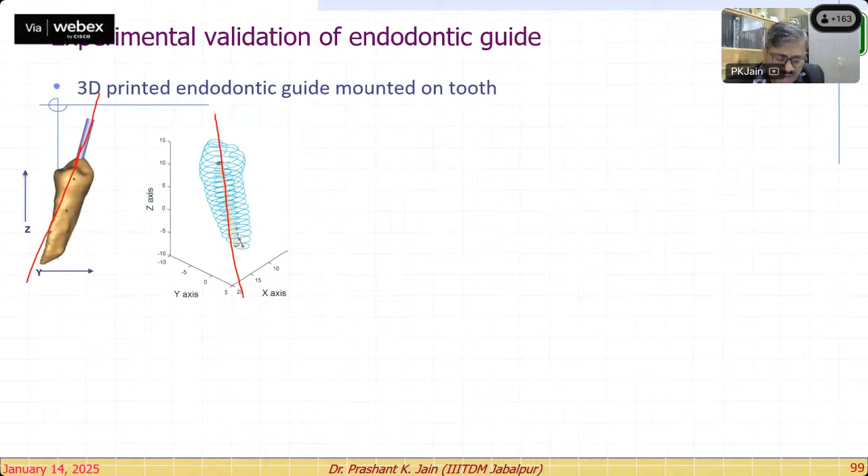Okay. Then based on this tooth, you can see over here, this direction has been identified, right? Once this direction is known, to perform root canal on this tooth, what we have done is built this STL model. This is the guide model, or you can say surgical file model. And then we have created this CAD model of the jig, right? This is 3D printed and this is the original tooth.

Right? So based on this, we will fit it in, perform a lot of operations, and then this is the validation. You see here, the bottom side is the actual extracted tooth, okay? And on this the jig fixes, like this. So this is the tooth model, this is the jig, and this is the hole which has to be created. So in this jig model, the pre-drilled holes are there, right? So the doctor knows in which direction they have to use the file. Okay.

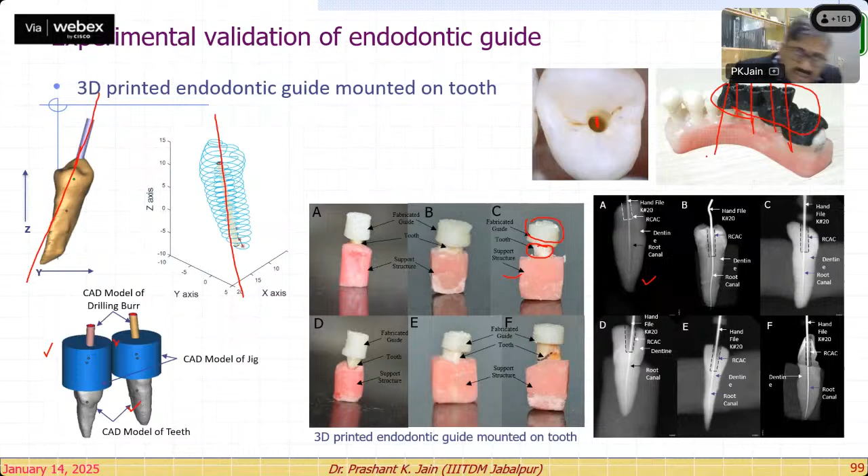So based on this grayscale value, we have given the height. Okay. So based on this height, right? Based on this height, we have chosen the top part to be printed, right?

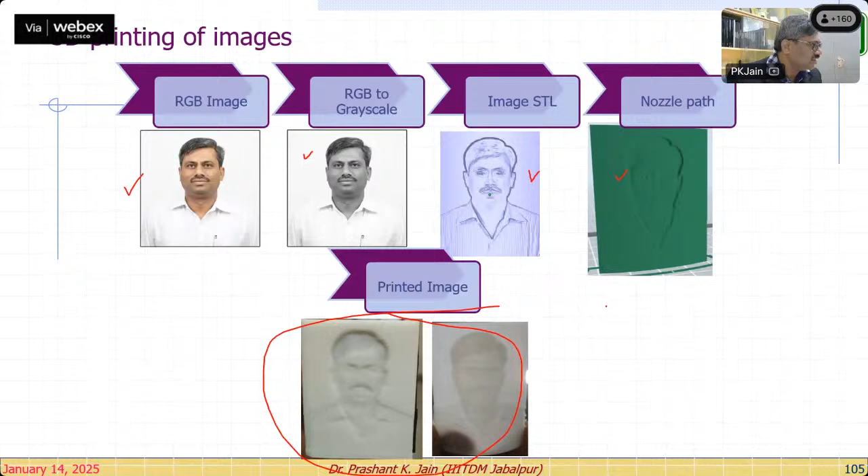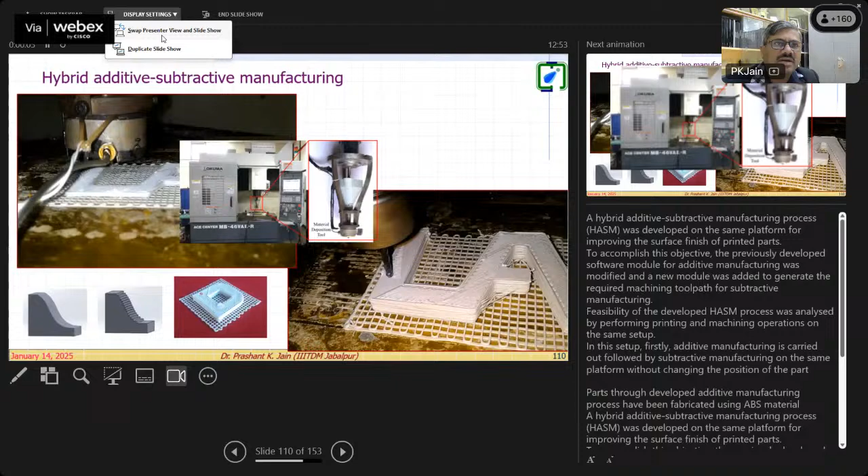So look at this. Let me show you this machining video first. Can you see the machining on your screen? The deposition is done. This is on the CNC machine.

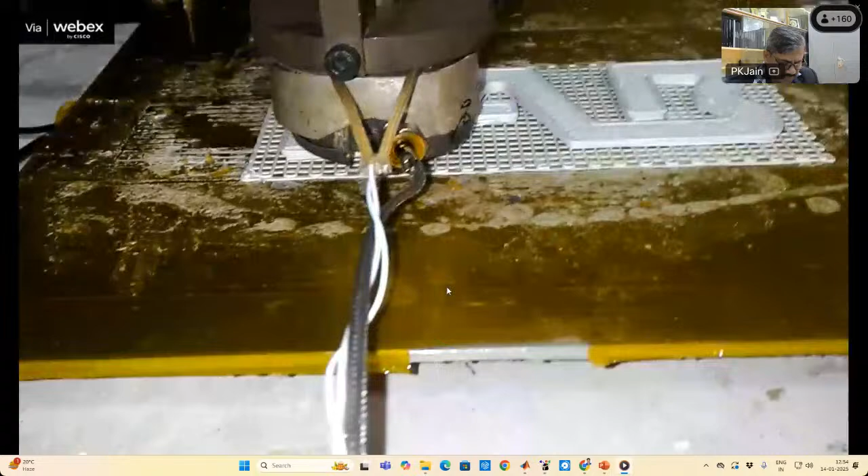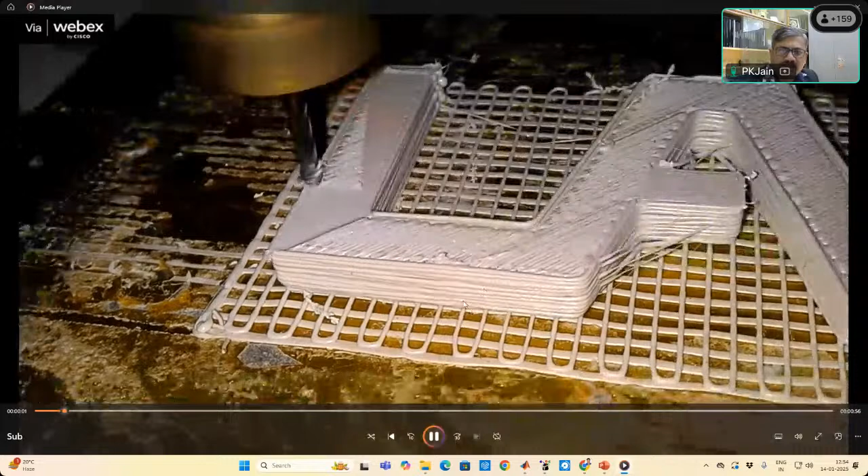Right? So this is one, where the deposition takes place, right? Let me show you one more video before we jump into the questions. On the same setup, look at this. On the same setup, the CNC machine is removing the material.

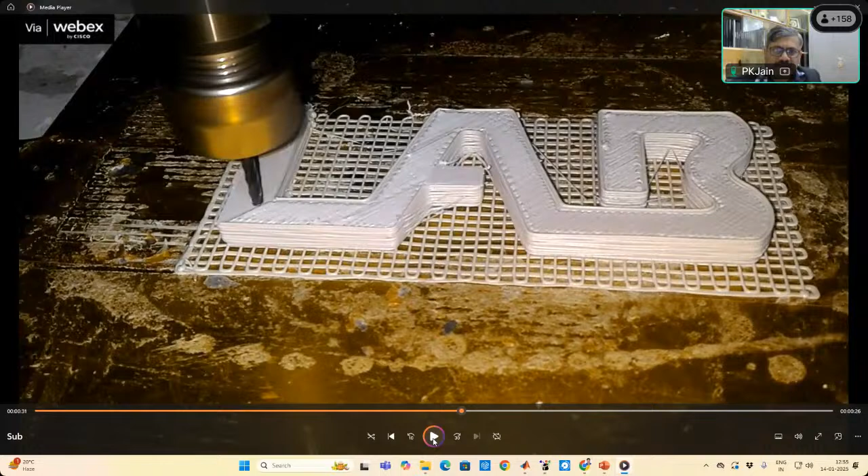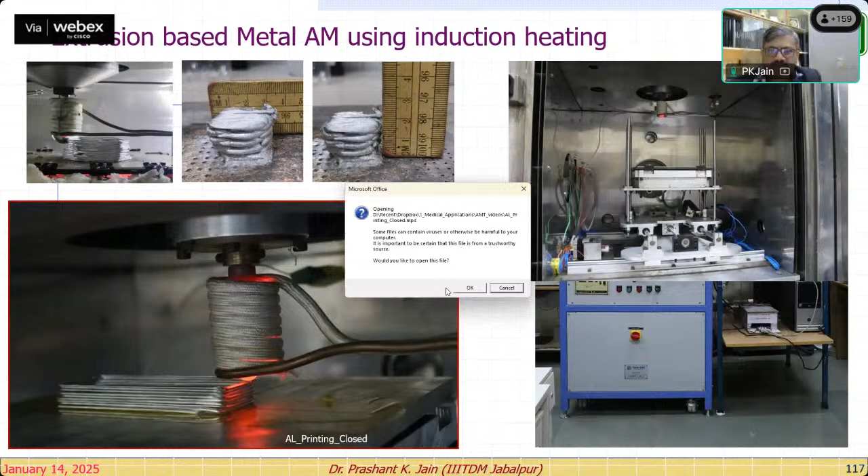The flexible part, the electronic circuit printing part, I'm not going into that. The aluminum printing, we are just recently working on, so I'm not going into that as well. This is our aluminum printer. You can see over here, just like your 3D printing machine, this is the in-house developed machine which is printing the aluminum.

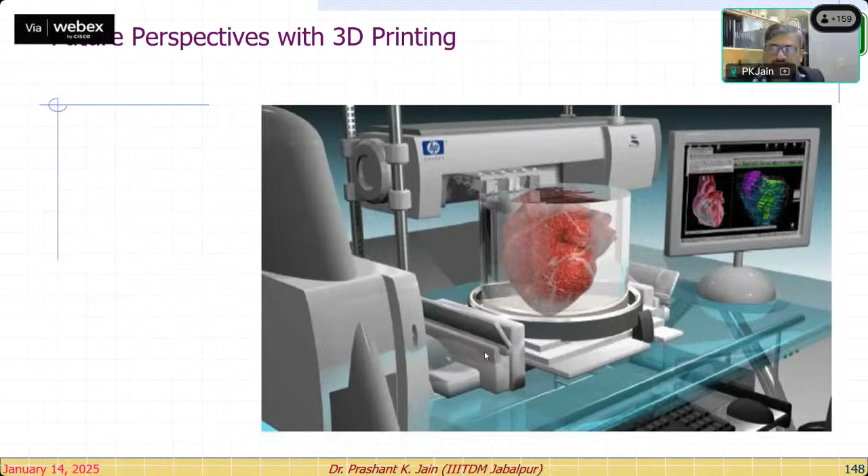Right. So let me close this, and I will just show something more. And this is what we are looking at for the future of 3D printing. You can see the body part on your screen, right? So this is the future perspective with 3D printing. And let me close this session and let us open up. I think the panelists may unmute for your questions.

Got it, it's polymer based. Yeah, Dr. Pandey. Any polymer which has a tendency to be joined together, we can use, and that is in pellet form. So there is no issue with what size of the wire we have. Any size of pellet we can have depending on our nozzle, right? So this will be printed.

Okay. Which type of software is required for converting an X-ray image? This is the Mimics software I have shown you. Mimics, the Materialise Mimics website, you can open and you can find the software. Let me show you. You see the first part, the first slide, right?

So TMJ surgery, precision solutions, right? Tumor, many things you will find, right? On this website you can go and find a lot of things. And these are the developers of the Magics and Mimics software. Okay.